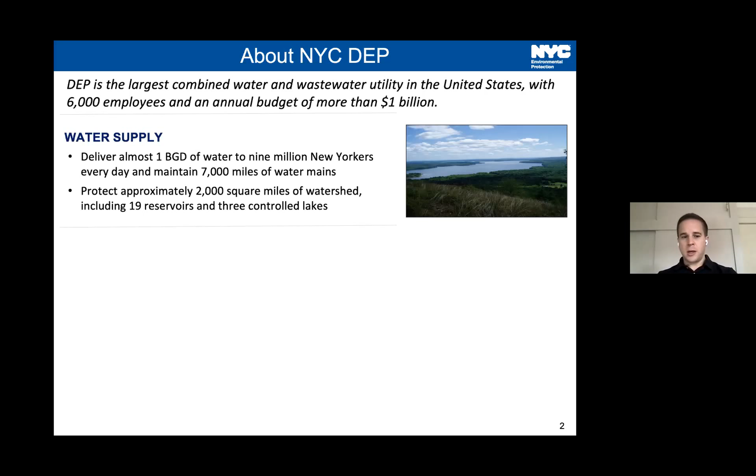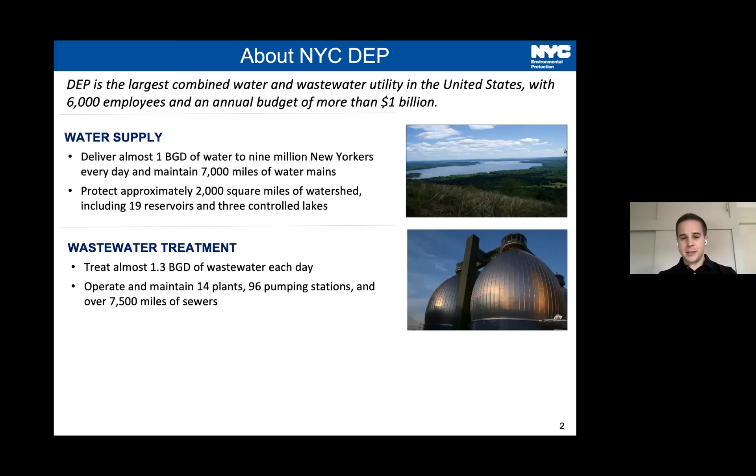We are the largest combined water and wastewater utility in the United States, with about 6,000 employees and an annual budget of more than $1 billion. We deliver almost 1 billion gallons per day of water, apologies for the non-metric units, to approximately 9 million New Yorkers, and maintain about 7,000 miles of water mains. We protect approximately 2,000 square miles of watershed, including 19 reservoirs and 3 controlled lakes. We're also responsible for wastewater treatment, treating over 1 billion gallons of wastewater each day. We operate and maintain 14 wastewater resource recovery facilities, about 96 pumping stations, and 7,500 miles of sewers. And last but not least, we're also responsible for air, noise, and hazardous waste controls and enforcement in the city.

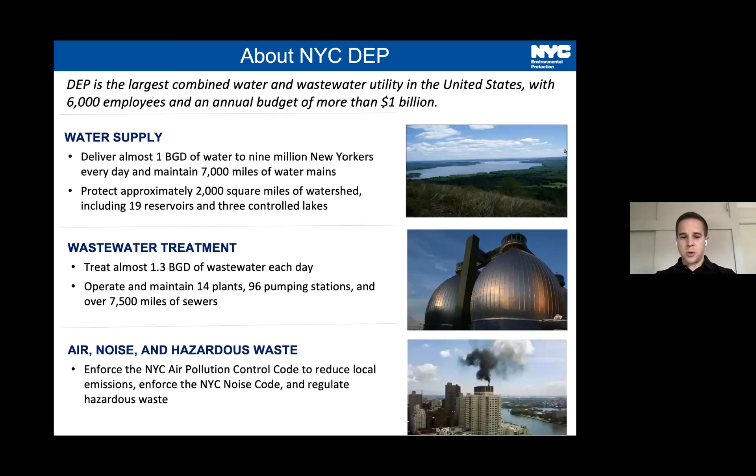So the system right now is not particularly circular in terms of actual water. We are, of course, making efforts to recover solids and energy from our wastewater stream. But the system starts at our water supply reservoirs, is used in buildings in the city, is in some cases combined with precipitation that falls in our streets, and ultimately, after treatment, is discharged to New York Harbor, which is an extension of the Atlantic Ocean.

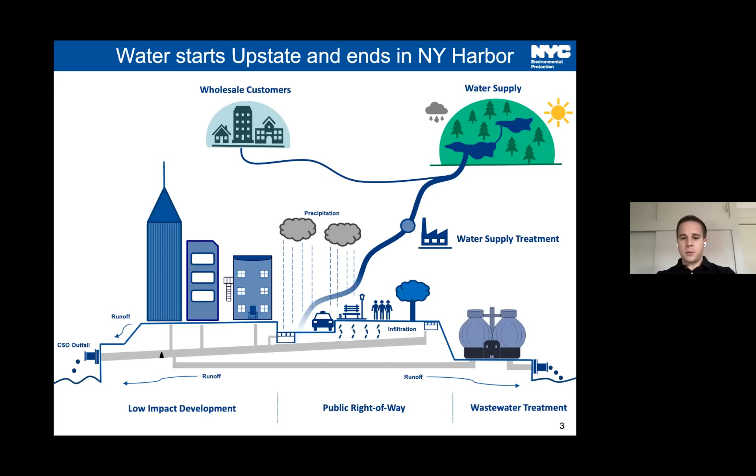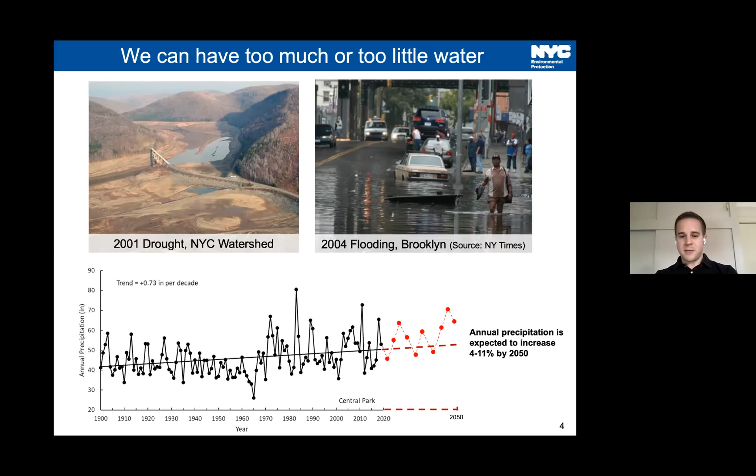We are expecting our annual precipitation to increase by 4 to 11% by 2050, which doesn't sound like much, but if we start to see these peaks and dips and peaks, we're noticing that our weather is becoming wetter and wilder, as I've heard our colleagues in Copenhagen say.

So in dealing with wet weather events, we're increasingly increasing our green infrastructure practices - taking runoff from impervious areas, diverting it into rain gardens, and letting it infiltrate into the ground. The New York City groundwater supply is not a source of drinking water for us, so we don't have concerns with regards to closing the loop there with the aquifer recharge.

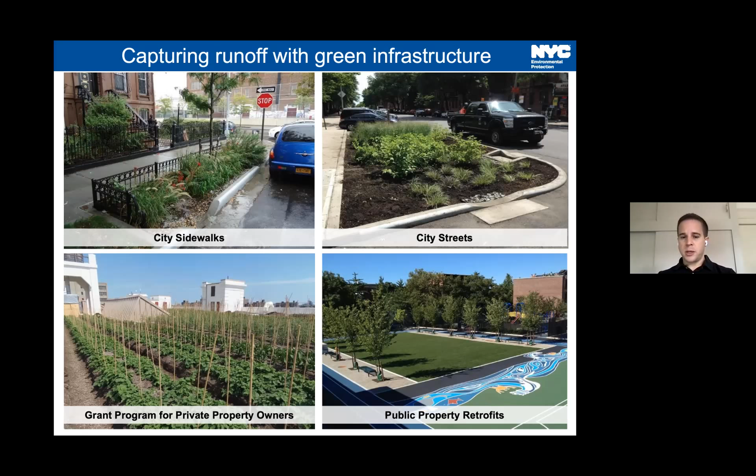But this is a way to take pressure off of our sewer systems. As you saw in my earlier graphic, it's a combined sewer system. So in a large part of the city, when there's a heavy rain event, there's untreated sewage spilling into the harbor. So this is primarily a strategy we're employing for reducing combined sewer overflows, but increasingly we're also looking to employ this for decreasing urban flooding.

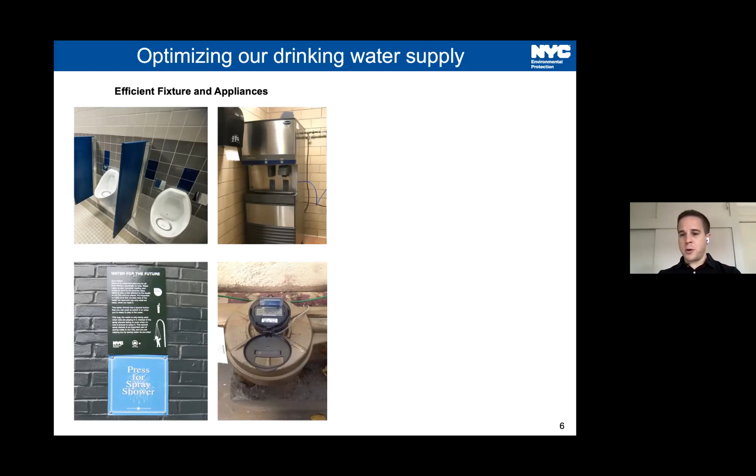On the other side of the equation, we're constantly looking for opportunities to optimize our drinking water supply. We've had a water demand management program in place since 2013, where we're actively working with partners to retrofit fixtures - toilets, urinals, ice machines, spray showers in parks - any opportunity we can find to optimize our existing supply. This not only increases our resiliency to future drought, but also decreases the flow to our sewer systems, also helping us with our combined sewer overflows.

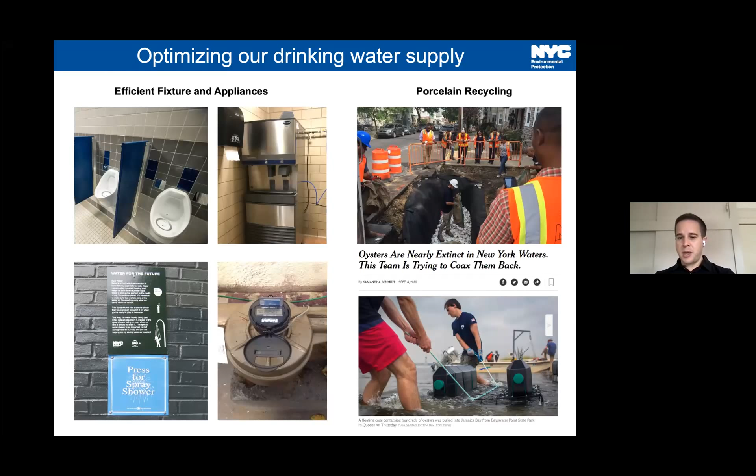And we have found opportunities here as well to close the loop on some of the fixtures that we've been replacing. We've actually used the porcelain from some of the toilets that we've taken out, first on the top right in some of the green infrastructure rain gardens that we're putting in the street, and on the bottom right, where we did a project using the porcelain to help promote oyster reefs in Jamaica Bay, which is just south of JFK Airport.

And so the good news is that water demand is decreasing to a now historic low - that's 981 million gallons per day in 2020, even though population is at a relative high of about 8.3 million people in 2020. So where we are looking to go next is really merging the two.

Water conservation and reuse and innovative stormwater management and resiliency - at the nexus of that, we have an integrated water management approach. So ideally, when we're implementing projects, we're achieving multiple benefits, and water reuse really fits in very nicely in that nexus.

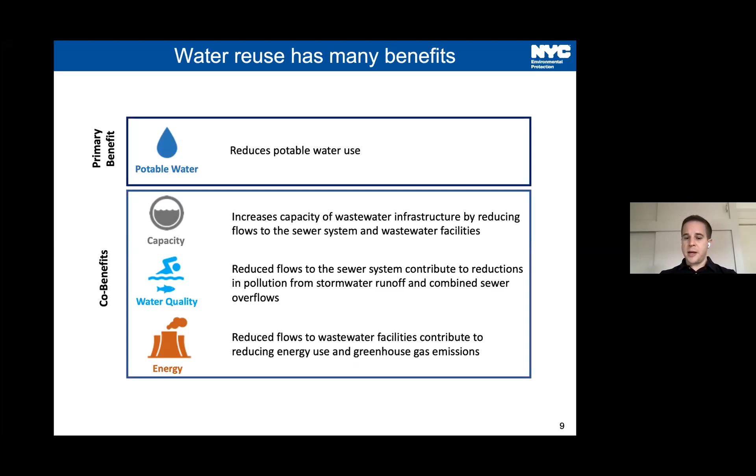It reduces potable water use, it increases capacity of our wastewater infrastructure by reducing flows to the sewer system and our wastewater facilities. It therefore reduces flow to the sewer system that can contribute to combined sewer overflows during a heavy rain event. And by reducing flow to the wastewater facilities, it's also reducing the energy used for treatment.

And so we have a couple of examples of water reuse in the city that have actually been funded by my agency. Most of the projects have been funded through our green infrastructure program, but we're also increasingly funding these programs through our water conservation and reuse programs.

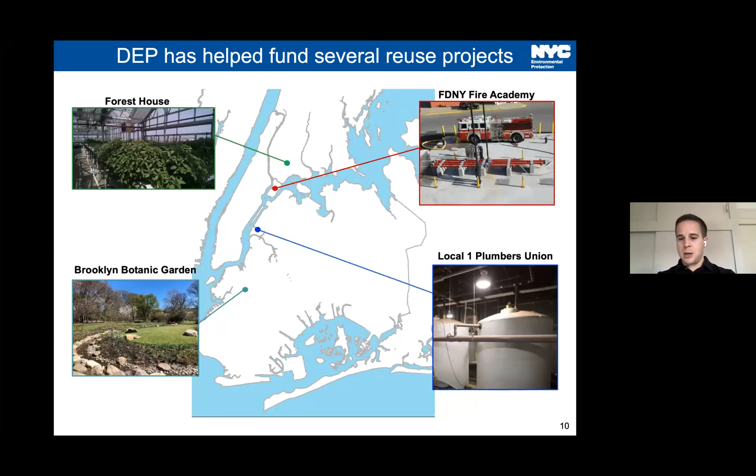The top right is the Fire Academy, which is collecting water that is used to calibrate fire trucks, and instead of letting it run off into the river, is collecting that water to be able to reuse it for the next truck that needs to be calibrated. And finally, Local 1 Plumbers Union in Queens is using rainwater for some of its training facilities.

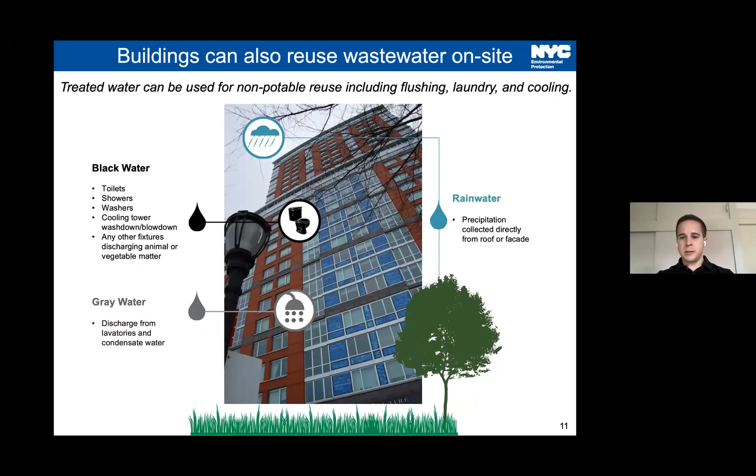In-building reuse is happening and has been happening for some time in New York City, but not so much on public property - rather this is really taking place in private property. And the timeline of reuse in New York is really that the development happened prior to the regulations and incentives being in place. So the Battery Park City Solaire was the first residential high-rise with on-site water reuse.

And following that, we created our first incentive program to provide a discount on the water rates to buildings that implement water reuse in New York City. In 2008, we started to adopt water reuse and water conservation into the plumbing code.

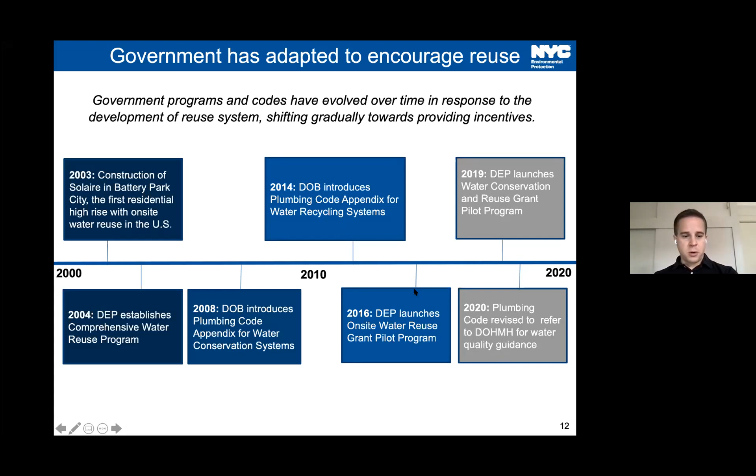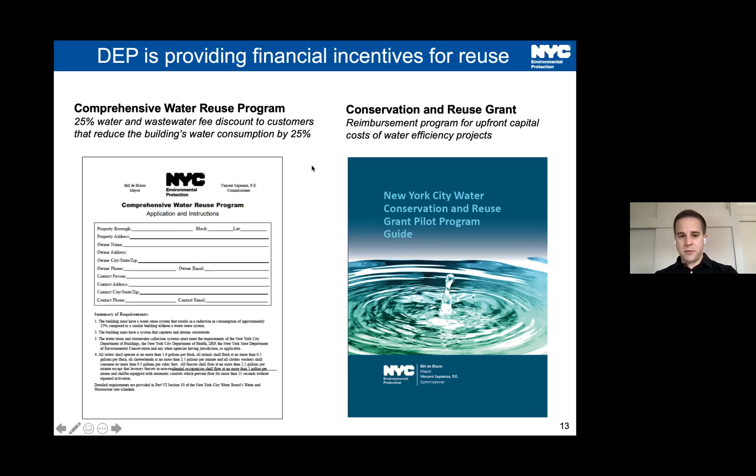So these are the incentive programs that I've mentioned, and I don't want to take too much longer, so we can come back to this later. But these are the comprehensive water reuse program, which is the rate incentive, and then the grant program, which is the capital funding incentive. And these are available on our website, which I will provide a link to.

Increasingly, water reuse is becoming a prominent part of the conversation at the national level. I believe it was last year, February 2020, there was the National Water Reuse Action Plan that is setting a national agenda for water reuse in the United States. And prior to that, cities working with the Water Research Foundation and others had taken a lead in developing guidance to help cities that want to promote water reuse.

And so I'll stop there. As I mentioned, a lot of the information that I discussed is available on our website. You can find it at this link, and you can reach us by emailing waterconservation@dep.nyc.gov. So thank you.

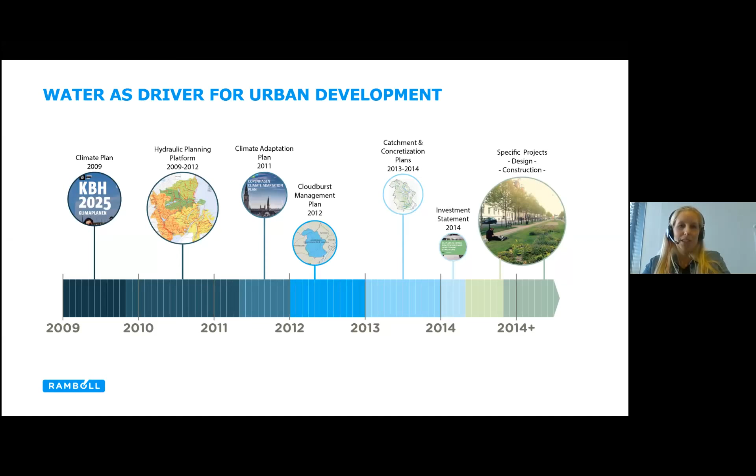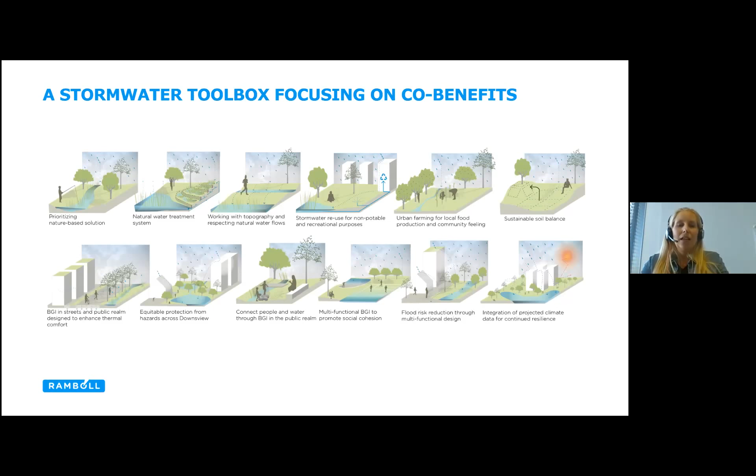Often we look at all these pretty renderings and think, well, is this even possible in reality? We have some really cool examples of implemented projects that were driven by flooding or water quality concerns. After they're implemented, because of this focus on co-benefits, we actually see them provide so much more.

This one is from St. Anne in Copenhagen, one of the first cloudburst projects. It's a flood reduction project, but it's provided new employment, new businesses, new playgrounds. So instead of being an area where you park your car, it's actually an area you come to enjoy. The business case for this obviously looks completely different.

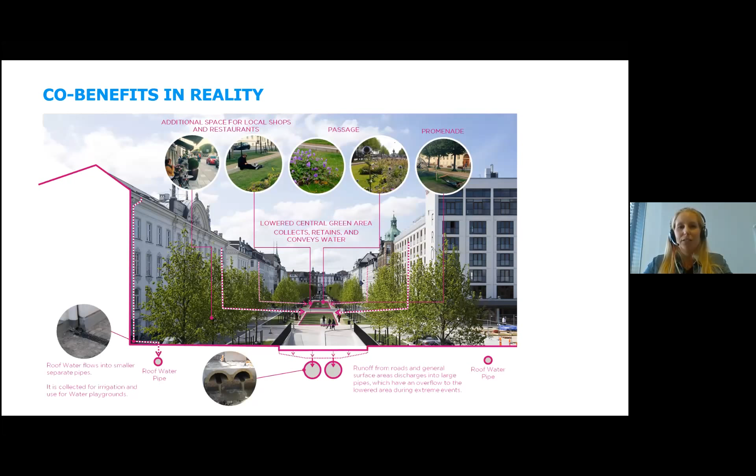That is something we work a lot on, trying to understand how funding mechanisms can be improved by focusing a lot more on these co-benefits when we talk about the business case. So it's not just investment, cost, and risk reduction, it's also everything else — air quality, recreational uses, and so on. That is really changing how we think about things, but also very much how we work.

Climate justice is also something we're starting to see a lot more. Equity, I know, is also on DEP's agenda. That's everywhere — equity is key to the future. I think having water drive so much also presents a new responsibility where you can think about how much you can actually improve, not just related to water, but also to some of the other socioeconomic challenges we see in the urban space.

That means many of our projects are much more bottom-up than we've seen before. We're engaging with churches, schools, communities, and so on as we go out and design our projects. That means they look completely different than we would normally have done, and it's teaching them and us a lot as we move forward. It's basically a win-win for many.

We have a bunch of really good examples of how that's been done from around the world with different focuses — some more flood oriented, some water conservation oriented — but they typically focus on both or multiple benefits. We'd like to think of our solutions as not providing one solution, but actually fixing multiple problems. I brought one example from Singapore, an old drainage channel that was turned into a nice park.

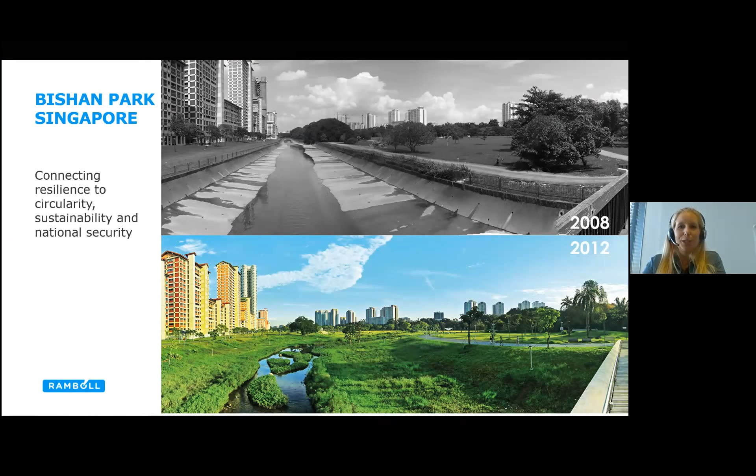Obviously it's a cool project because it's big and it's implemented, so we can show it. But actually it was more the collaboration with community and with universities that was really, really cool.

For instance, this is a water treatment area where we have circulation in the little plots you can see, where we test different treatment methods with the local university. We also worked with schools, making sure there was education as part of the program — I know DEP is also working on this. It's just proven immensely giving, both for them and for us.

And then obviously we care about nature and biodiversity, so we like to see that there's some local animal life in our projects. This is how it looks today. It's one of several projects where we've seen that engaging with community is really key — not only in meeting our targets on water management and leading on sustainability and resilience, but also providing multiple benefits. For the taxpayer and ratepayer, it's really maximizing what you get from what you're paying.

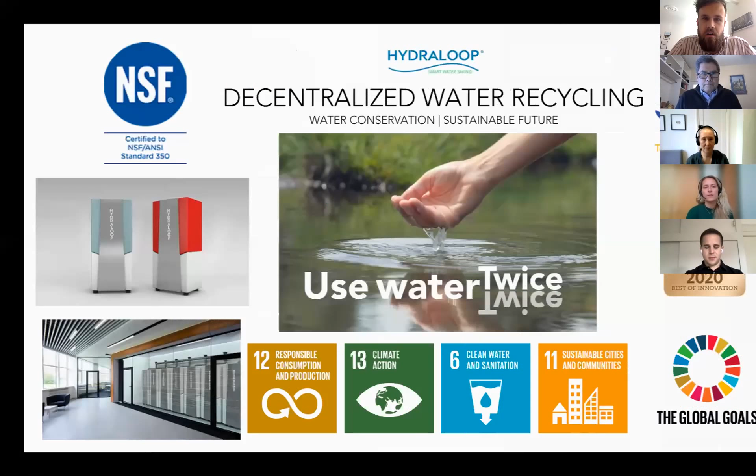Hydraloop is a Dutch company, based in the Netherlands. We have been working on developing a decentralized water recycling system to conserve, reduce water consumption, and optimize the use of our precious water resource. So water conservation is core to our mission.

We have, as an organization, a commitment to ensuring that we can bring technology and innovation to the challenges that we see globally. And globally does not suggest just in developing countries. This water crisis, the water challenge, is a global problem that we all face, and one of the biggest challenges to humanity.

For those of you that might have had the opportunity to watch the Brave Blue World documentary on Netflix, it was a tremendous documentary that really highlighted to the global community the challenges of the water crisis globally. But equally important, it wasn't just highlighting the challenge, it also presented solutions, innovation from necessity driven by human challenges, and companies like Hydraloop were part of that documentary. We were very proud to be selected to be part of that, and it highlights the powerful solution that we have put together.

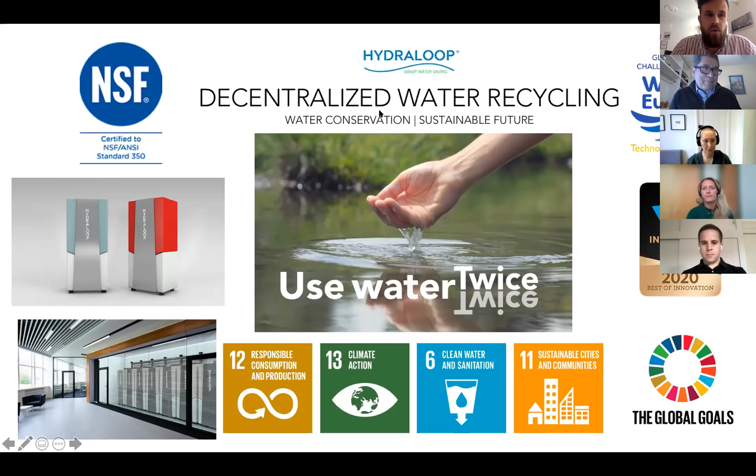Super, thank you Fernando. We'll quickly go straight into Nanna, who's representing LNH Water. My name is Nanna Ravn. I'm from a very small engineering company located in Copenhagen, Denmark. We are only 3 people employed, and we have a couple of part-time employees as well.

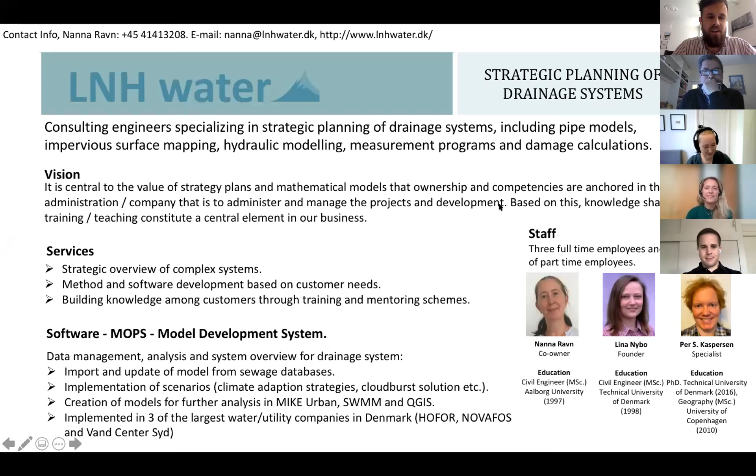Super, thanks Nanna, and thanks to all of you for giving a quick overview and introduction. Time is running quick, I think we're very optimistic in this 45 minutes, but we can quickly jump into some questions around some of the presentations. There's been a few questions in the chat, but Alan, you've already answered them, so you're being very efficient. But I have a first question, more general, I'll start with Alan: you presented a number of government programs and support mechanisms for these new solutions and ideas. What is the biggest barrier for water reuse in New York City that you've experienced?

I think the single biggest barrier is there's been a lack of an entry point in terms of who's responsible in government. The starting point is really the Department of Buildings, because they ultimately are responsible for the plumbing code and permitting water reuse systems to go into place. But then there's us, the DEP, who administers the incentives and the grant program. And increasingly, the Department of Health, as I mentioned in my presentation, is going to be playing a role. So it's a very complicated landscape to navigate unless you've been working with us in the past. For someone trying to get into this space, that's very confusing. However, by offering the grant program, we're trying to take on more of a role as an entry point, to help anyone interested in implementing water reuse navigate the ins and outs of water reuse in the city.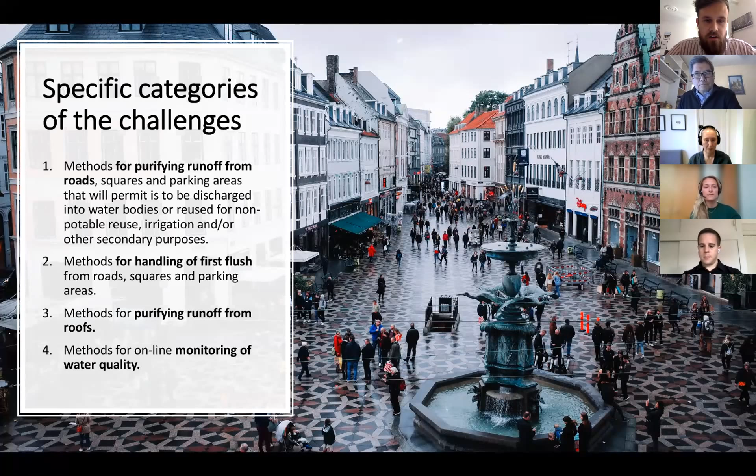This is happening very soon. You can see the specifics of the challenge here, looking at purifying, handling, and monitoring of water quality. I'd encourage anyone interested to sign up. I'll share the presentation after this session, and feel free to contact me at Clean.